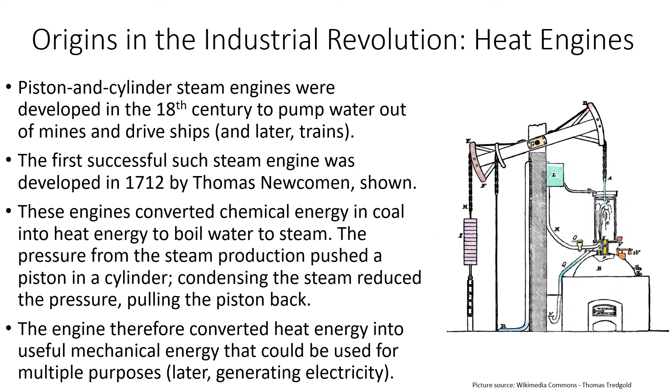And so these early steam engines, on the other hand, they really were extremely inefficient. And so, yes, they could do useful mechanical work, but actually most of the heat that was produced was not converted into work. And we see these initial absolutely minuscule figures for the percentage efficiency. So that's just 0.5% of the heat energy being converted into the mechanical work.

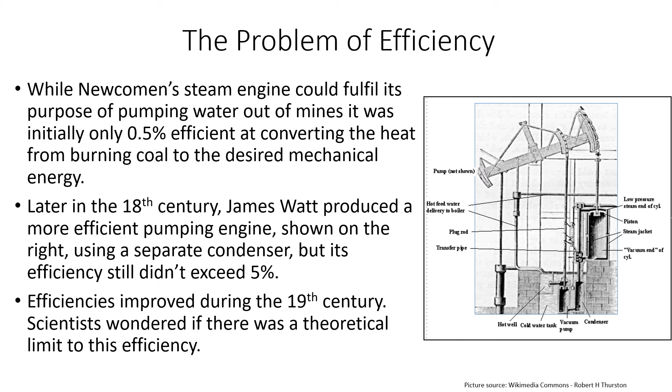But there were later refinements in the technology, notably James Watt, later in the 18th century, producing a more efficient pumping engine. But even so, it wasn't achieving brilliant efficiencies. They still didn't exceed 5%, so efficiency was still a major issue. So efficiencies did improve through the 19th century, but of course that got scientists wondering, how efficient could you be? Was there a theoretical limit to this efficiency? Could a machine be 100% efficient, converting heat energy into work energy?

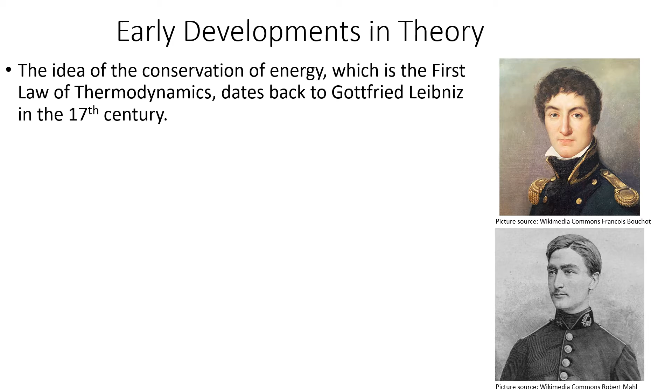And so there's a sort of family connection here we're going to see in a moment, but just to preface this with a comment that ideas of conservation of energy can be traced back to Leibniz early in the 17th century with the first law of thermodynamics, which really states the conservation of energy. And so later on we get to see this family connection early in the 19th century with Carnot developing his theorem that ultimately there was an inevitable dissipation of energy that would make, for example, a perpetual motion machine impossible.

And so he really had in mind this idea, the inevitable friction that would take place in a machine and the vibrations that were always found, and how this was tantamount to a loss of energy. So essentially he was able to rule out perpetual motion machines, and that's Lazare pictured at the top. But actually it was his son, Sadi Carnot, who made really the more significant point extending this theory.

So he made the point that even if a machine could be made absolutely ideally, in the sense that there's no friction whatsoever, no vibration whatsoever, despite all that, you still couldn't get 100% efficiency in the conversion of heat energy into mechanical energy. And so Sadi Carnot's great breakthrough was actually determining what the maximum theoretical efficiency would be, and using his model he ended up with a very surprising result, that it only depended on a ratio of temperatures of the so-called hot and cold reservoirs.

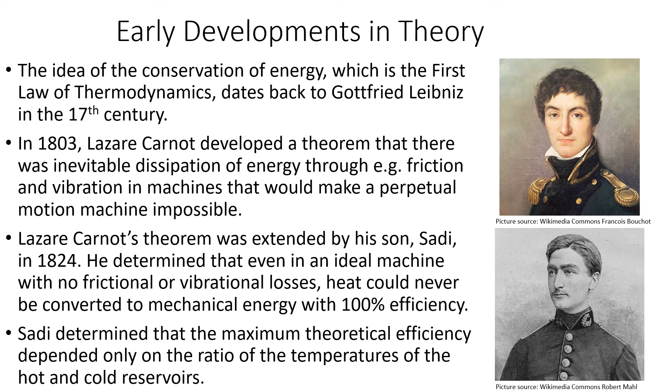So the hot reservoir, this is ultimately the heat source. So for example, if you're burning coal, that would generate a lot of heat, that would represent the high energy end of the machine, and then ultimately as combustion products were exhausted and go out into the atmosphere, that temperature would represent the low energy end of the machine.

And so now to look at Clausius. And Clausius, in this pursuit of understanding about efficiencies, started working towards this notion of entropy, which was very closely related to this idea of efficiency, as we're going to see. I've mentioned Boltzmann before, but really it's Clausius's name which is most associated with entropy. Clausius is the name that we most associate with entropy on the macroscopic scale. So at the scale where we can measure things directly, like heat and temperature, Clausius made the important breakthroughs.

And so really he formed a mathematical basis of what we mean by entropy. He was looking at heat and work, the relationship, the equivalence between them. And so he came up with this definition of entropy, looking at a heat change divided by the temperature. As you can visualize this, if you put a certain amount of heat into a system, you can imagine that heat energy having more of a disorganizing effect if a system is at extremely low temperature compared to if it's already very hot.

I think we mentioned before the analogy between shouting in a crowded bar versus shouting in a quiet library. While there's already a lot of ambient noise in a bar, adding a bit more energy through the form of shouting doesn't make a huge amount of difference, but it makes a very significant difference in a very quiet environment.

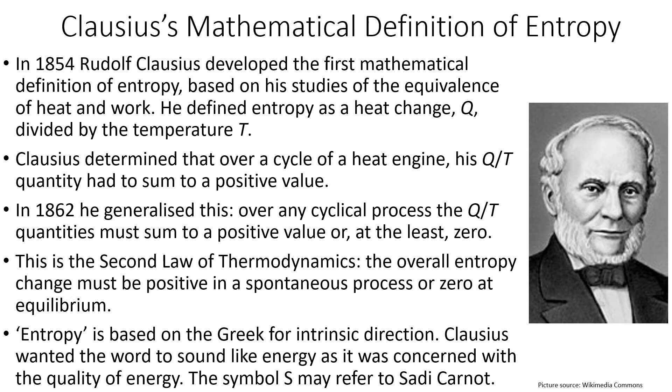Now we're going to look at the Carnot cycle. This was something Carnot invented to tackle this problem of the maximum possible efficiency that you could have in a heat engine. There's nothing meant to be realistic about this; he's just looking at an idealised case, an idealised model. It's not in any sense meant to depict a real engine.

And so what he did in this theoretical treatment was produce a cycle in this heat engine that had 4 different stages. We'll have a look at those in turn here. You have a so-called working fluid, and the working fluid is the gas in the movable piston. As a working fluid, it's the thing which expands and contracts and does the work.

It's associated with the moving parts. And so if we go first of all to the top right picture, we have here this hot reservoir and heat travelling in from the hot reservoir to the working fluid. You can see the working fluid here is shown as red molecules, and it's depicted as being at the same temperature as the hot reservoir.

So the heat that's coming in from the hot reservoir is not actually increasing the temperature of the gas, but heat is going in and causing the gas to expand. And again, with the hot reservoir and the gas being at the same temperature, you could model this as being quasi-static, that's to say extremely slow, rather like a process that's effectively at equilibrium.

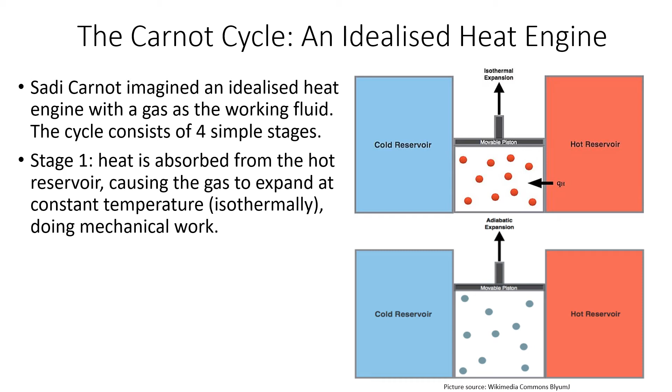And so the energy that comes in from the hot reservoir keeps the gas at the same temperature, so-called isothermal, but the energy gets converted into work, and this is the piston moving up. So the piston is working against the external atmosphere in this so-called isothermal expansion, which is being powered by energy from the hot reservoir. So this is the first stage of our cycle.

And then in stage 2, we somehow isolate thermally our working fluid from the hot and the cold reservoir. So now there's no heat flowing between the reservoirs in this stage. This is what adiabatic means. It's thermally isolated. And this hot gas, which is initially at the temperature of the hot reservoir, is going to expand just by virtue of the energy of the particles.

And so as the particles do work, pushing the piston back against the atmosphere, that work comes at the expense of the internal energy of the gas. And so the gas is going to cool down. We're going to get more expansion, but this is adiabatic expansion. The energy given to this expansion is coming from the gas itself, and so the gas cools in the process.

So again, in this idealized system, the gas is going to expand until it's cooled to the temperature of the cold reservoir. So it's converting the internal thermal energy of the gas to mechanical work. And that's going to set us up for stage 3.

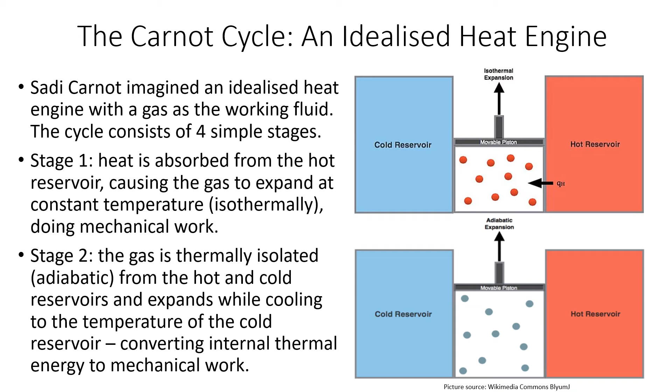Now, of course, normally when we compress a gas, we heat up the gas in practice. So, for example, if you're pumping up a bicycle tyre, you can feel the tip of the pump getting very hot as you compress the gas. So we typically associate compressing gases, doing work on the gases, with heating them up.

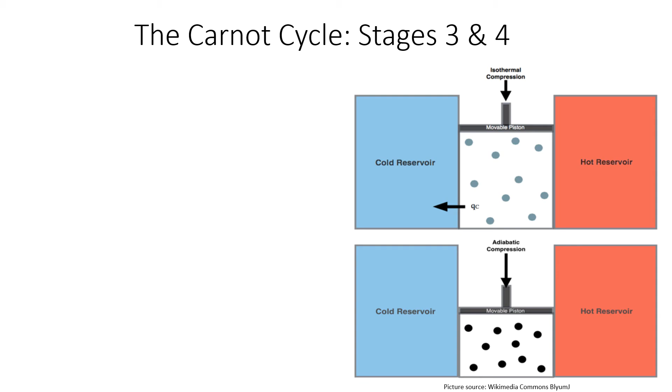But in this idealized case, the work that we do on the gas, that energy is actually going to transfer into the cold reservoir. And we can see this symbol Q sub C, Q for heat, and this is heat going into the cold reservoir. So the idea is we're going to return the piston back into its original state.

We're compressing the piston down. We're doing work, if you like, the atmosphere is doing work on the gas, and ultimately we're keeping the gas at the same temperature and moving the heat into the cold reservoir. So there we go, that's stage 3.

And then finally we have the so-called adiabatic compression. Remember, adiabatic means that the system is thermally insulated, so we're not having heat moving into or out of either of the reservoirs. So we're going to compress the gas a bit further, and we're going to heat up the gas as we compress it, to the point it gets to the same temperature as the hot reservoir.

So effectively in this final adiabatic stage we're returning it to the very beginning, where it's going to be in thermal contact with the hot reservoir. So these 4 stages take our working fluid around this theoretical cycle, and at the end it's got back to where it was at the beginning.

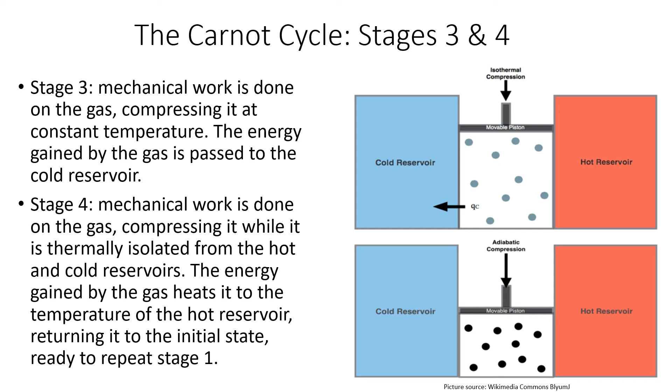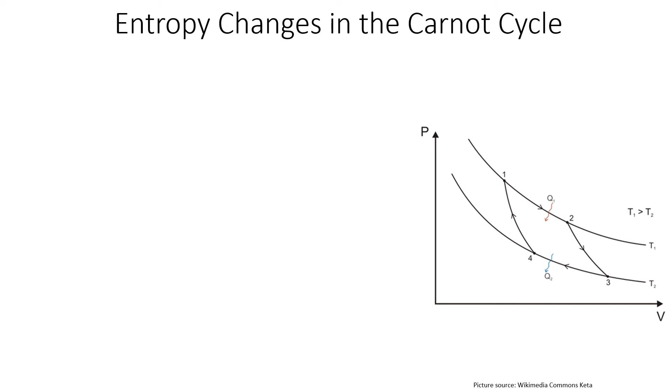And so the final stage here, going from point 4 to point 1, again the volume's going down, it's an adiabatic step, there's no heat being transferred, and so as the piston is compressed, it heats up and it moves up from the cold temperature T2 to the hot temperature T1.

And so another point about this is that if you're really thinking about efficiency, ultimately the most efficient processes are carried out reversibly. This is sometimes called quasi-static, which means very, very slow. So it's, to a best approximation at any moment, resembling an equilibrium. And of course, under equilibrium conditions, the entropy isn't increasing. So making these systems change very, very slowly is the way we can minimize the increase in entropy. And this was actually the approach that Carnot took, this idealized state where everything is a bit like an equilibrium at any given time.

And so this next point here, again, just refers to the heat exchanges with the reservoir. Q1, the energy coming in from the hot reservoir, and Q2, the energy going out to the cold reservoir. So because the heat is changing in the form of Q1 and Q2, the entropy must be changing. And of course, as Clausius defined it, the entropy change is going to be Q over T. With Q1, heat is going in, so it's like a positive Q, and so the entropy is going up. And in Q2, the heat is leaving the system, so that would be a negative entropy from the point of view of the system.

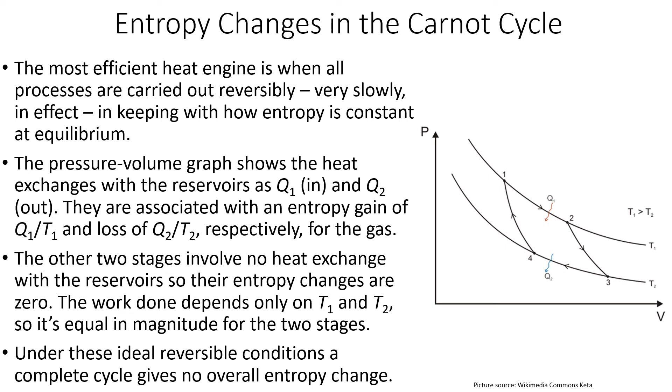And so under these most ideal conditions, so no one's really pretending that this is going to happen in real life, but as a kind of thought experiment, the absolute limit of efficiency we can possibly have would be where a complete revolution of the cycle would give no overall entropy change, as a kind of theoretical ideal. Then we can look at the work involved in these heat exchange stages.

So if we're going to say that there's zero entropy change overall, then it means we're going to equate the magnitudes of the entropy gain and the entropy loss of the two stages where we do see heat being exchanged. So we've got the Q1 over T1, that's the entropy of the system increasing in the first stage, and the Q2 over T2, where the entropy change is going to decrease in the isothermal compression. And if we're going to say that the overall entropy change of the whole cycle is zero, then these two stages where the entropy changes, they're going to have to be equal and opposite, so they sum to zero. And so that's expressed here.

And so I've actually been a bit neglectful of the signs, so I suppose here I'm really concentrating on the magnitudes. So I suppose you could argue that Q1 and Q2 should have different signs because one is heat going in and one is heat leaving, but I just want to concentrate on the magnitudes being equal here. And so as we come up to here in this third point, ultimately the work involved in stages where the heat is exchanging with the reservoirs is going to depend on the pressure and the volume of the gas.

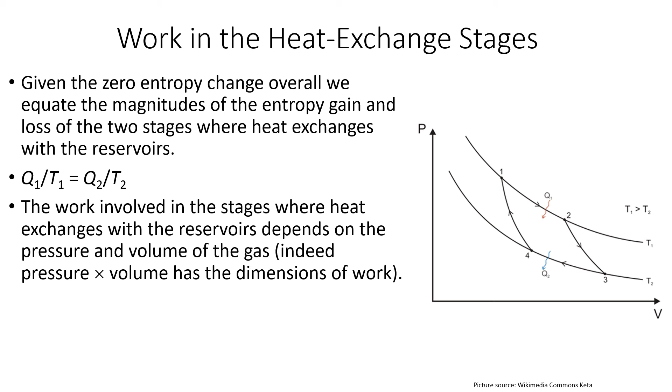And in fact, one thing we can see here is that if you take the units of pressure, so pressure is measured in pascals, isn't it? So that's force per unit area, newtons per meter squared. And if you multiply that by the units of volume, meter cubed, you get newtons times meters, and newtons times meters is in fact the units of work. So you can see here that pressure multiplied by volume is, dimensionally at least, equivalent to work. So this gives you the kind of pressure volume connection here to the work.

And so again, using this idea of the symmetry of the system and the ideal conditions, hopefully it's not too big a leap to appreciate that ultimately the ratios of the volumes are going to be equal for the two stages as well. And since pressure is proportional to temperature at constant volume, this is going to lead us to this result: Q1 over Q2 is T1 over T2. So again, we're disregarding the signs here of Q1 and Q2 and just considering the magnitudes.

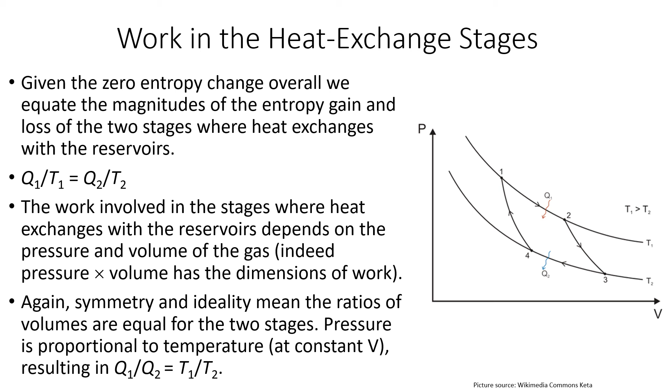And in fact, this is something we can go back and prove later on more rigorously. It's just a bit more difficult mathematically to do it absolutely rigorously. Here is just kind of a justification. And so here we've got these ratios between the two quantities of heat energy involved being equal to the two temperatures involved for the two reservoirs.

And now to look finally at the efficiency. What we need to do, we need to consider a complete loop of the cycle to represent this whole process. And let's look at it in terms of energy. Now, the only processes which change a form of energy from one type into another involve heat and work. And so we can see that we have Q1 heat going into the system and Q2 heat leaving the system. And the Q1 going in is going to be larger than the Q2 going out, as we established that the heat is proportional to the temperature.

And so by conservation of energy, the difference in energy between the amount of heat going into the system and the amount of heat leaving the system must be equal to the work that the system will do overall. And it's this that we use in the calculation of the efficiency.

So we're defining efficiency here, which we're using this Greek letter eta for, as the overall work done as a fraction of the heat energy that's been given from the hot reservoir. So this Q1, it comes in from the hot reservoir. So, it would be nice if all that energy that comes in could be converted to work. But as we see, this doesn't happen. Some of that heat remains as heat as it leaves the system, but the remainder gets converted into work. And so we need to find out what that fraction is.

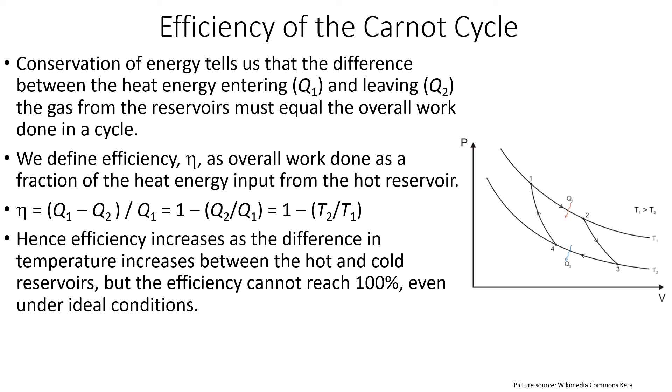And so the crucial point here is that the efficiency is related just to the temperature differences in this model, and that in practice you're never going to reach 100%. So even if all these things we're assuming, like we can treat the gas as an ideal gas, we can treat all the changes like they're quasi-static equilibrium-like changes, all of these ideas, unrealistic though they are, they still don't give you 100% efficiency. The efficiency is limited by the temperature difference. And so this kind of comes back to an earlier point we alluded to.

It relates to the quality of the energy. So heat is a very kind of disorganized, low quality form of energy. All the particles are just bouncing around in a kind of random, disorganized way. And what we're trying to do is convert that low quality energy, heat, into high quality energy, mechanical work. So this is actually moving something against a force. So mechanical work is, if you like, the most ordered, high quality form of energy.

And so it's perhaps intuitively not all that surprising that starting off with really low quality energy, you can't 100% convert it to high quality energy. We can get some high quality mechanical work out of low quality heat through our heat engines, but it's never going to be a 100% conversion.